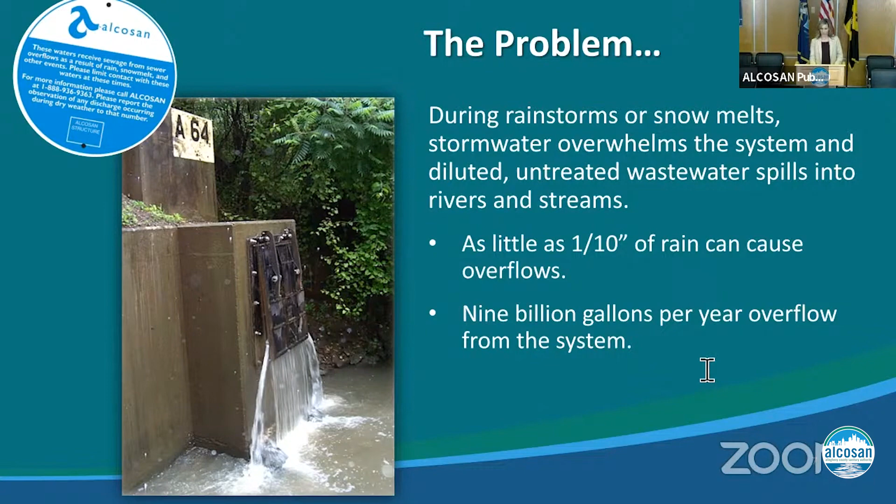So today we're going to share with you the solution. The solution is ALCOSAN's Clean Water Plan. This Clean Water Plan was part of our consent decree, and it was approved in 2020. The first phase, called our interim wet weather plan, is to be completed by 2036. It's a $2 billion investment, and that $2 billion was in 2010 dollars. This plan will reduce the overflows in our region and improve water quality. Again, that's a joint goal for all of us. And this work includes a lot of benefits for jobs in our region.

Today's presentation will include 4 components of the Clean Water Plan: regionalization, GROW source control, plant expansion, and our regional tunnel system. Regionalization is a partnership with our customer municipalities where we plan to take over some of the trunk sewers so we can convey sewage from outlying municipalities down to the ALCOSAN conveyance system. Julia Spiker, the manager of regionalization, will bring us through that presentation today.

Our next topic is GROW source control. I don't think I have to introduce Tim Prevost today, but he is out in our communities educating our municipalities on what GROW is and how we can partner with them to hold that water or remove it from our system.

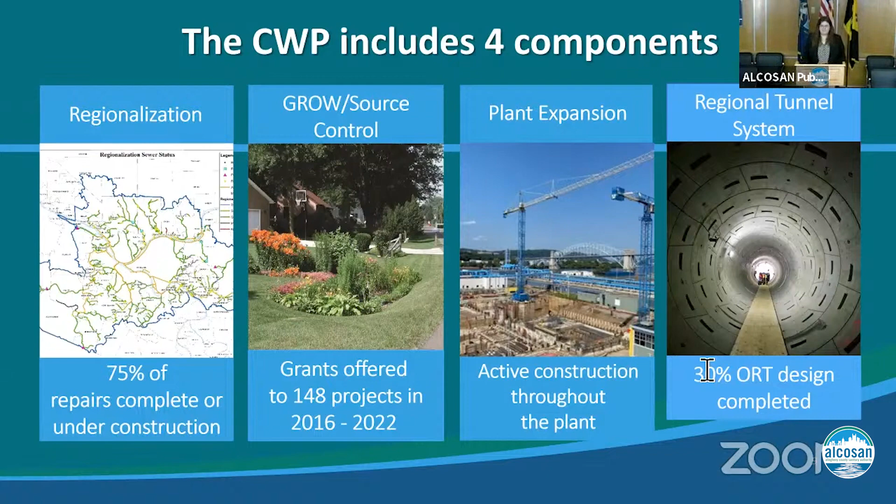Thank you, Michelle, and thank you all at home for tuning in. We have a lot of exciting updates on the regionalization program. Michelle mentioned that regionalization is one of the pillars of the Clean Water Plan that really involves the customer municipalities voluntarily electing to transfer some of their sewers from municipality ownership, operation, and maintenance to ALCOSAN's ownership.

Those sewers were identified through a lot of collaboration and communication with our stakeholders several years ago. We landed on criteria being sewers that were 10 inches in diameter or larger and conveyed flow from more than one municipality. When we looked at that criteria across our service area, that resulted in 265 miles of sewer eligible for transfer. The goal of our consent decree is to make a good faith effort to transfer at least 200 miles, so the criteria works. We met that goal and exceeded it.

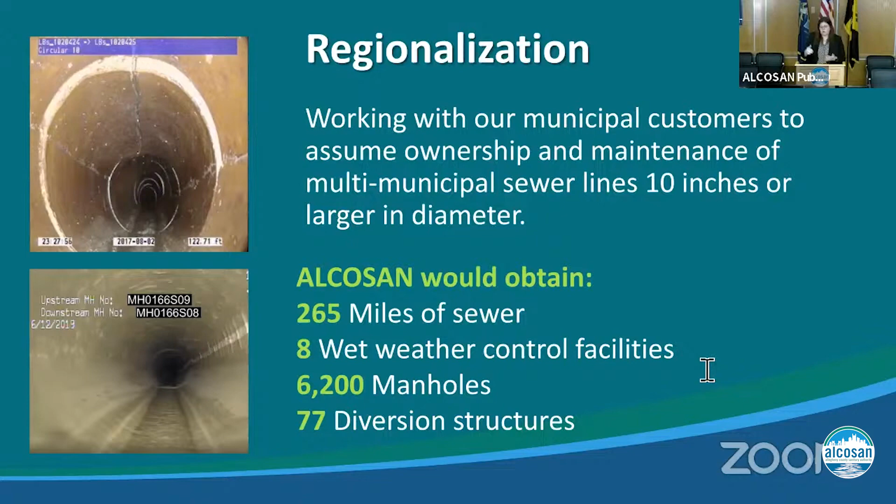Along those lines, there are 8 wet weather facilities. Those include pump stations to lift the flow so it can be properly conveyed to ALCOSAN for treatment, or equalization tanks, which are large areas where you can hold water back during wet weather and then slowly release it to the system when it has a chance to recover, helping reduce sewer overflows and contribute to our goal of cleaner water quality. There's also 6,200 manholes along those lines, and 77 diversion structures, which are simply locations where flow is directed either to relieve itself out of the system through an overflow or conveyed down to ALCOSAN for treatment.

So as I mentioned, this is a voluntary program, but there's a lot of reasons why ALCOSAN is committed to this, as well as our customer municipalities. By taking the existing infrastructure we have and investing in it properly, we can leave this region with a system optimized in its hydraulics, conveying more flow. We also have the ability to make smarter investments of ratepayer dollars for projects that give us the highest return to meet the goals of the Clean Water Plan and ALCOSAN's goal of reducing combined sewer overflows. It also removes some of the arbitrary barriers where municipalities are simply limited by what they can do within those boundaries. This program would allow the sewers to extend beyond that, so we can really look at what would be the right smart decision for each watershed.

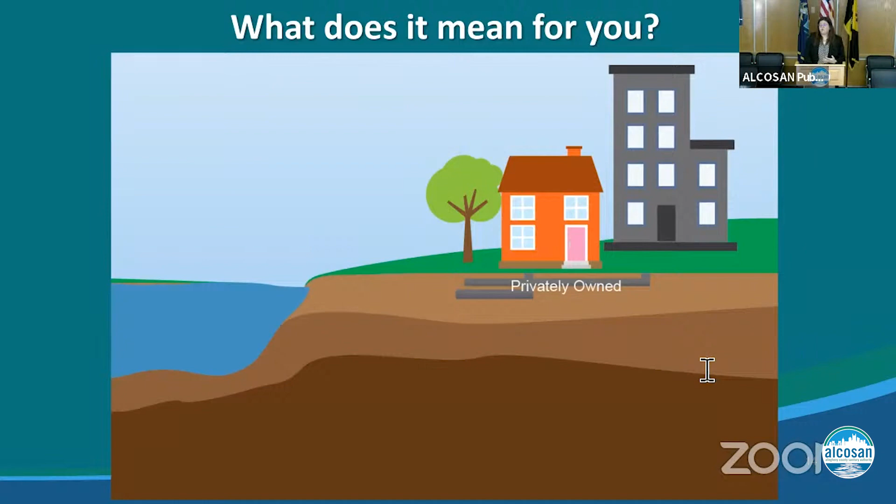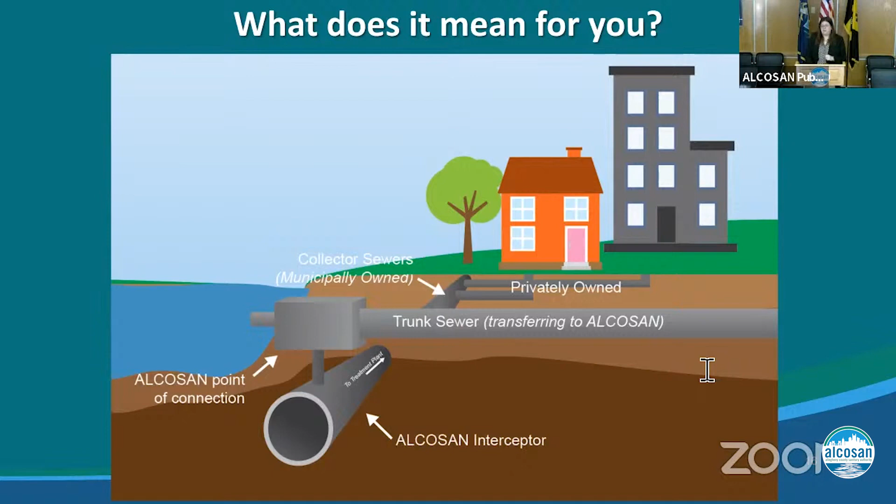So what does regionalization look like? Our homes and businesses have laterals, the first step on your journey down here to ALCOSAN. Those are typically privately owned and connect to a collector sewer, which is owned by the municipalities. Those collector sewers currently go into a trunk line, the larger diameter sewers conveying flows from many directions. Those connect to our existing infrastructure, those regulators where we tip that flow down into our interceptors and get it here. It's those trunk sewers that we're really focusing in on under the regionalization program.

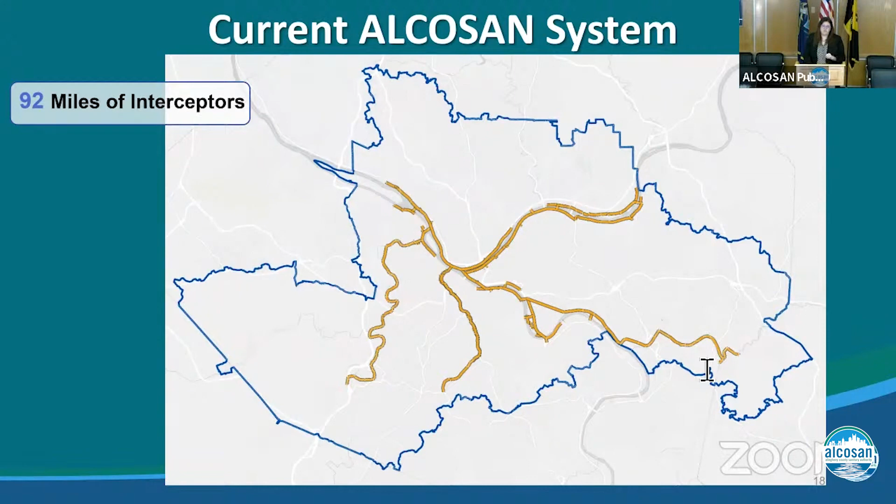ALCOSAN's system currently looks like this. All of those orange lines you're seeing are our 92 miles of interceptor. With regionalization, this is what the new system would look like.

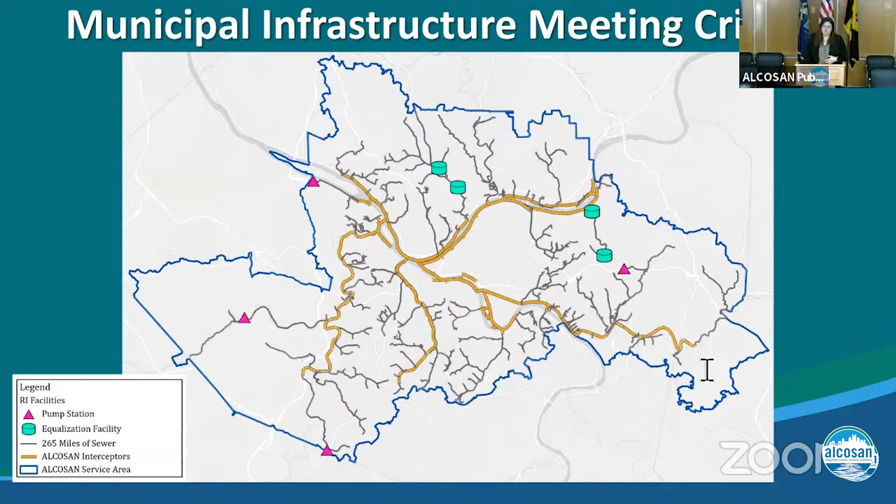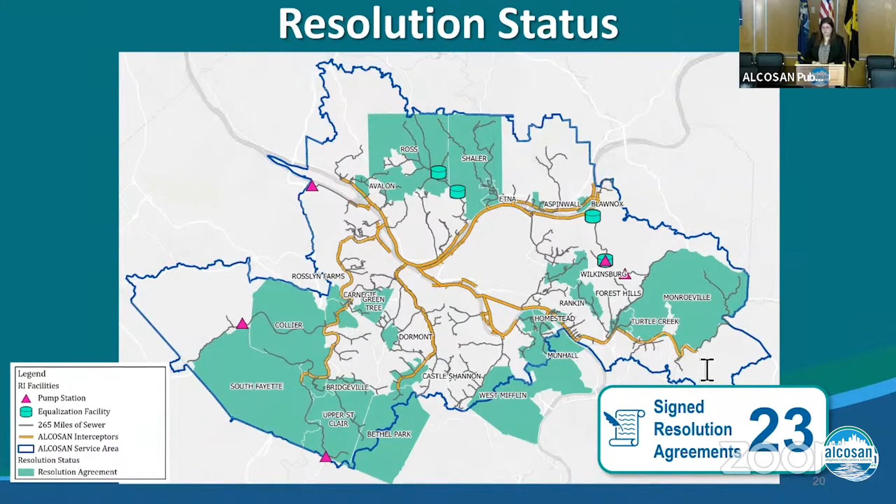It's a significant undertaking for the authority. Every one of those gray lines is one we're working with our municipal partners to transfer to our ownership and operation. Over the past year, the municipalities and ALCOSAN have made tremendous progress moving forward to that goal. The different municipal boundaries highlighted are those that have passed their resolution, which is really the first step where councils have said they want to move forward with the progress. These are the locations where they've committed to moving forward with transfer.

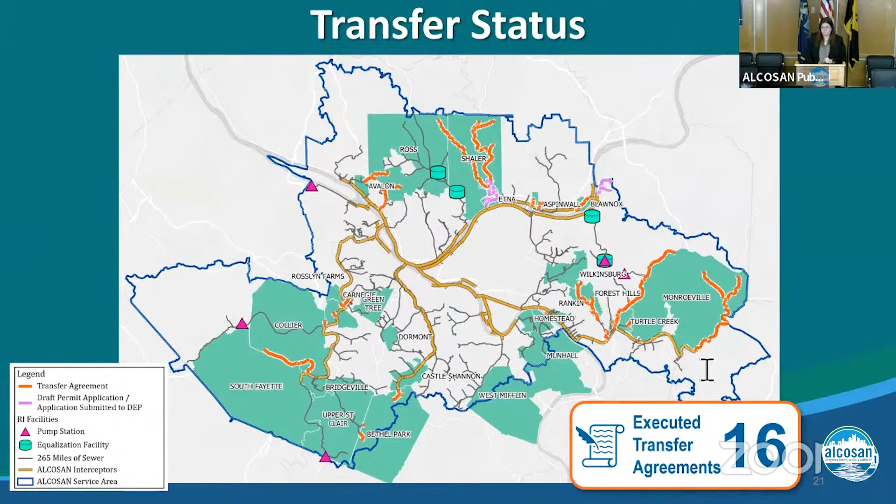I'm very happy to announce that ALCOSAN has completed transfer of 10 miles of sewer, and we have many more that are moving through the process.

The program is set up to be equal in its requirements and conditions for transfer across all of our municipalities. However, each municipality is different in their wherewithal and financial capabilities in moving through the process. We want to make sure that any municipality that wants to transfer has been supported through that effort. So we have two different paths.

One path looked at the defects identified through sewer inspections that began by ALCOSAN several years ago, where we inspected about 300 miles of sewers. Then we identified those critical defects where failure could be imminent, and the municipality needed to address those prior to transfer.

They can either complete those repairs, send us documentation, and then move forward with the transfer process, or we can negotiate and work together from the beginning on an appropriate cost for those repairs. ALCOSAN also has an option where we would allow them to pay us back over a period of time, so it's more achievable for municipalities that need that kind of support.

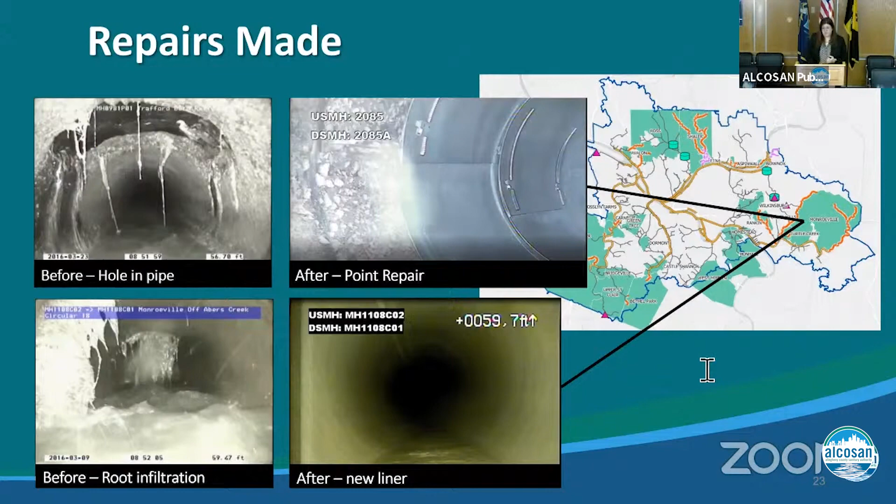Significant repairs have already been made. Typical defects found during that investigation could be holes in pipes or root infiltration, and the municipalities would go and make those repairs ahead of time and then send us documentation. We also saw some locations with fractures or collapsed pipes—those are really the ones we wanted to focus in on now.

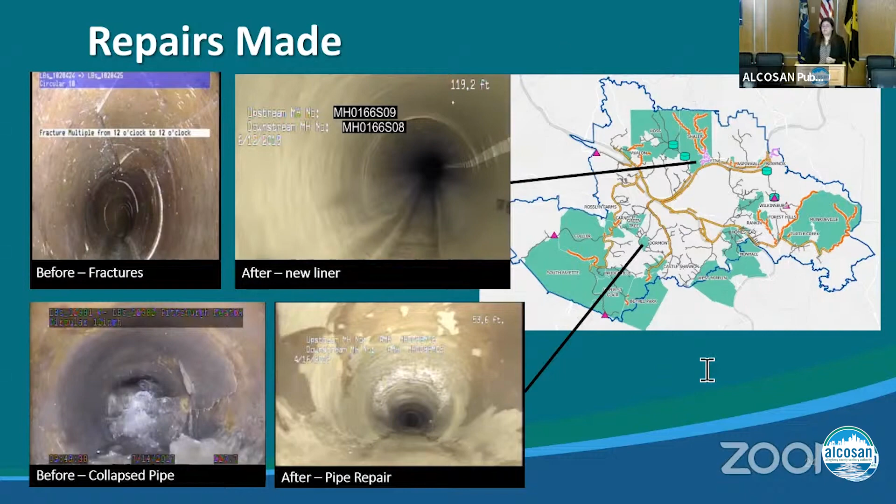It will be ALCOSAN's responsibility to maintain the repairs to this condition post-transfer. It will also be our responsibility to keep that infrastructure investment and the integrity of the sewers up to our standards and level of service, and we're doing that through our operation and maintenance.

Nate Carl is our manager of interceptor systems, and he oversees a crew of about 50 people with the right skill set and resources to mobilize and provide that service across the municipality, regardless of the type, size, or location of the sewer. So upon transfer, it would be our responsibility to operate and maintain the system that best supports ALCOSAN and our municipalities.

With that, I'll turn it over to Tim Prevost to talk about GROW and our source control programs.

Thank you, Julia. Today I'm going to share some progress that has been made with the Green Revitalization Of our Waterways program, GROW. GROW is ALCOSAN's $100 million grant program, and the objective is to provide incentive to our customer municipalities to do cost-effective source control projects throughout our service area.

The program began in 2016. We are currently just about to begin our 8th cycle of this program. In the first 7 cycles, we have over $70 million in grant funding offered to our customer municipalities, going towards 148 projects throughout the ALCOSAN service area. Based on these projects, we have estimated the overflow reduction will be roughly 227 million gallons a year.

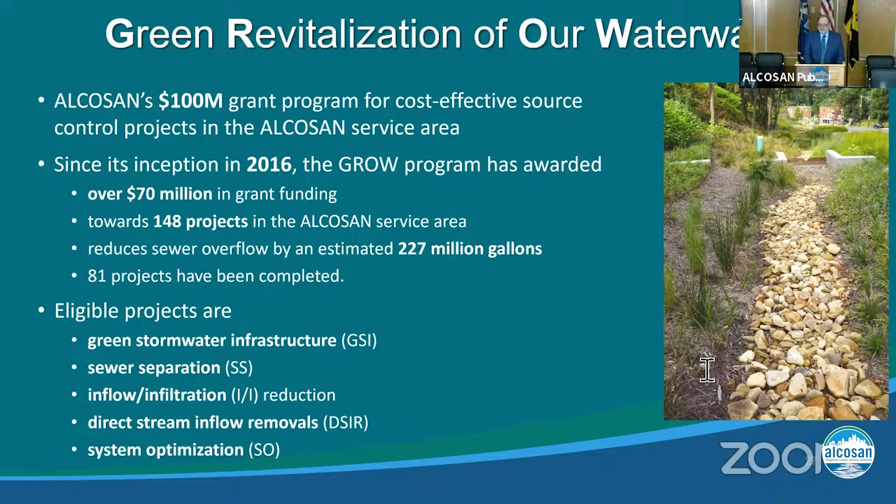Currently, and I'll talk a little more about this at the end of my portion of the presentation, 81 projects have been completed. Various projects eligible for GROW are green stormwater infrastructure, sewer separation, inflow and infiltration reduction, direct stream inflow removal, and system optimization.

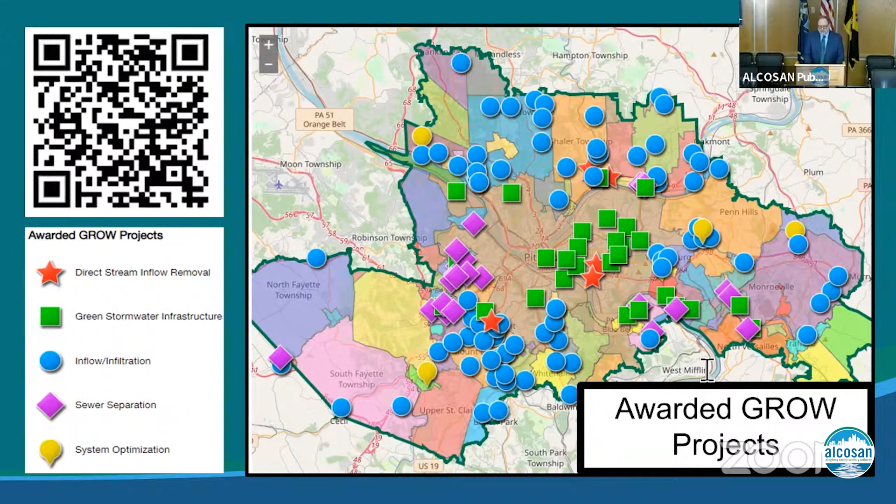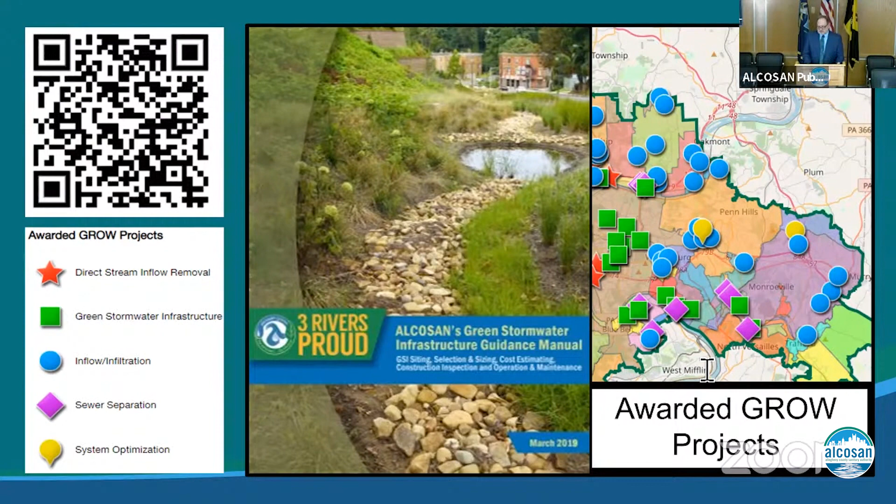I can give the audience a little bit of time if they wish to scan this. This QR code will take you straight to ALCOSAN's GROW site, where you can get more information about every project you see on this map. You'll also be able to get information on green stormwater infrastructure guidance, which is open to anyone in the public and will help you identify where a good project could be located and the various steps that go into siting a green infrastructure project.

And then you can also see a source control monitoring manual that we have put up.

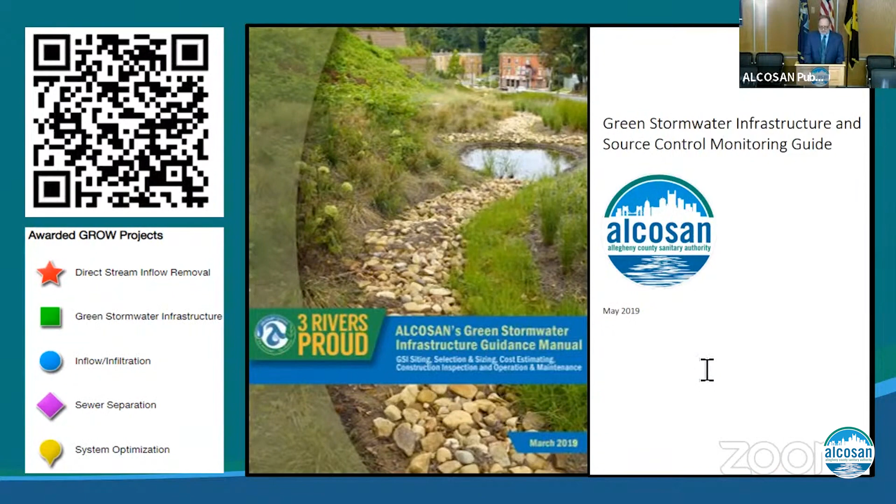Another resource ALCOSAN has provided to the public is Controlling the Source. Again, there's a QR code there. If you scan it, this will take you straight to the Controlling the Source page on alcosan.org. There you will find an executive summary, the entire report, all the appendices, and most importantly, an interactive online map, which will share overflow reduction efficiencies for the service area, a constraint analysis sharing what constructability impacts go into siting a green infrastructure project, and finally, potential project opportunities.

I would like to share with the public some highlighted projects. There are some green projects, some sewer separation projects, and a stream inflow project that I'd like to share with you.

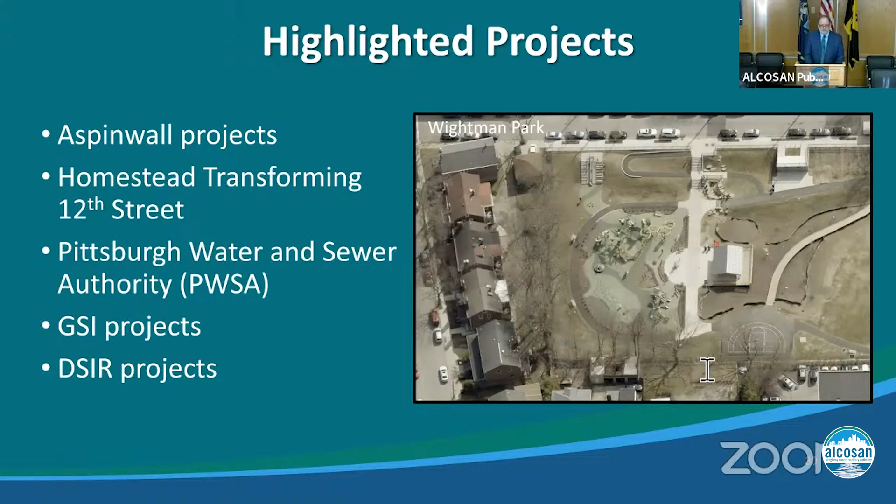The first I would like to share with the public is the Borough of Aspinwall. Aspinwall is a perfect example of a municipality phasing GROW projects to achieve a much larger goal. Since our first cycle in 2016, Aspinwall has put forward 4 projects: the Commercial Alley Green Infrastructure, Eastern Avenue Storm Separation, Center Avenue Sewer Separation, and Western Avenue Sewer Separation. All in all, ALCOSAN made an investment of $1.6 million.

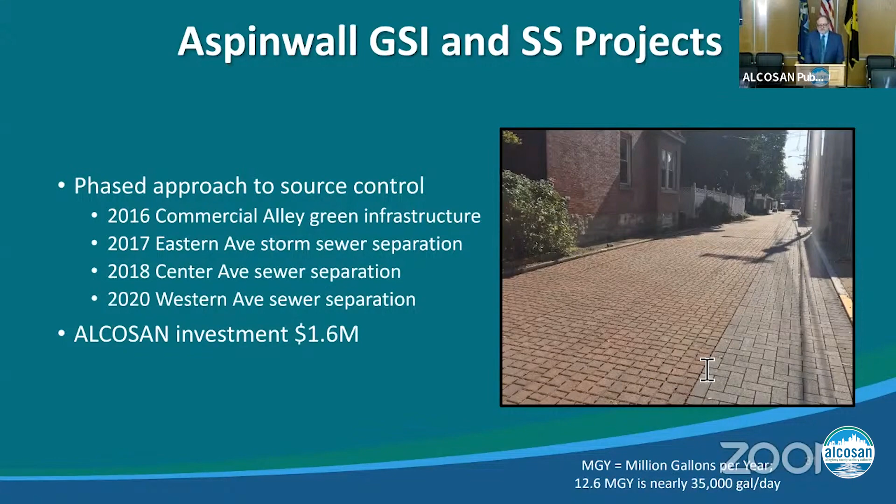The phasing of this started with the green infrastructure on Commercial, then they moved to Eastern Avenue, the following year Center Avenue, and then 2 years later Western Avenue. Upon analyzing all 4 of these projects together, we're anticipating over 11 million gallons a year of overflow reduction. We have seen in our monitoring efforts a little more than 12 million gallons of overall water being removed from the system. So again, Aspinwall is a great example of a municipality phasing their GROW projects.

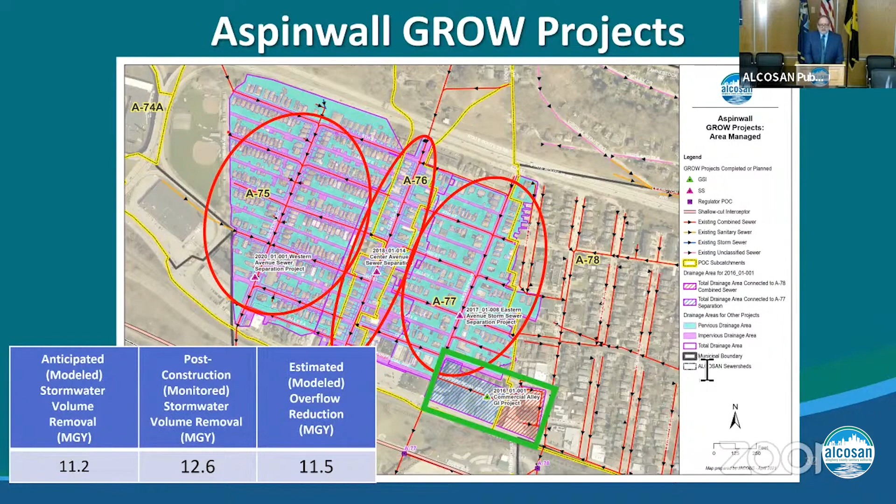The next project I would like to highlight is a good example of collaboration with ALCOSAN: Homestead's Transforming 12th Avenue. This project has been worked on for many years. Transforming 12th actually began as a school project for elementary school students at Barrett Elementary in the Steel Valley School District. This collaborative effort is between ALCOSAN, Homestead, and the Steel Valley School District.

What we tried to do when we helped Homestead develop this project was optimize the constructability and construction scope to maximize ALCOSAN's investment in the program. ALCOSAN hired an engineering firm, and we worked with the municipality and the school district to develop the plan for Transforming 12th. Based on the work we were able to do, we were able to provide this project an 85% match.

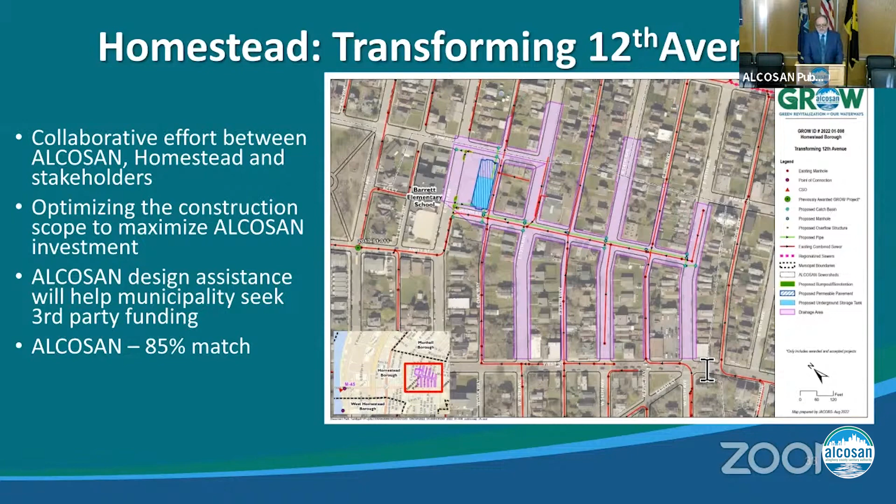What you see here is a layout of what the project is going to do for the municipality. Prior to this project, the playground area is asphalt, and the kids have to play on this asphalt. What we're going to do is switch it around to provide them with a park area that the school can utilize as a playground, and also parking for the teachers. Underneath the teacher parking is where some water storage tanks are going to be placed, and that water will slowly make its way back into the combined sewer system instead of it all going in during a rainstorm at once.

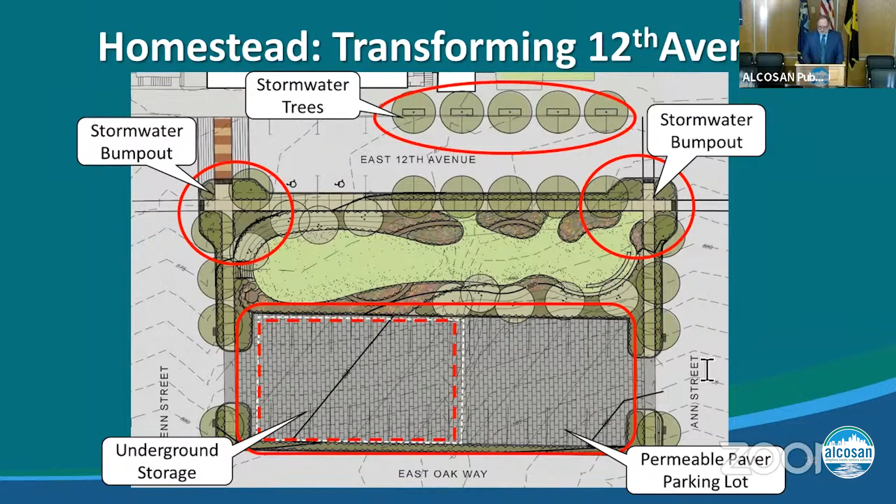The next projects I would like to share with you are from the city of Pittsburgh and PWSA. This map shows several projects throughout the city. I would like to focus on these 5 projects.

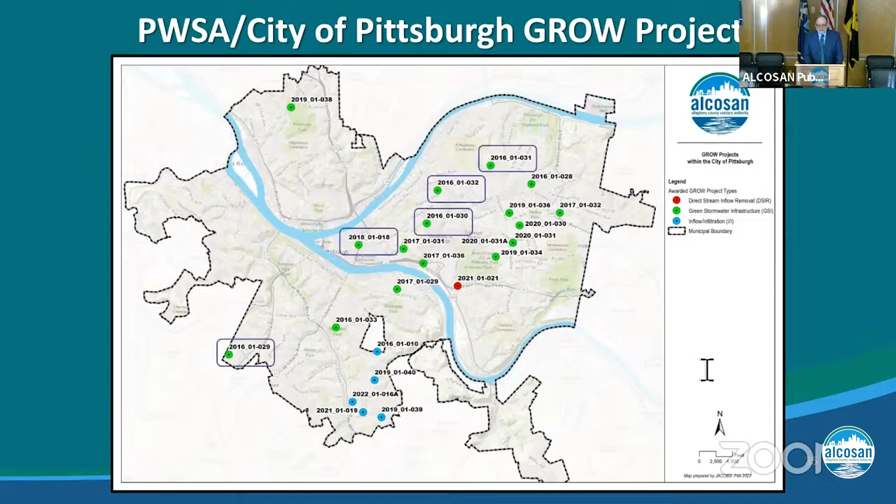These 5 projects have been completed. They have shared with ALCOSAN a final report showing the effectiveness these projects were able to produce. They are at Hasten Avenue in the Sawmill Run area, Centre and Herron in the Hill District, Hillcrest in Garfield, Melwood Avenue (I believe that is Polish Hill), and the I-579 Urban Open Space CAP project near PPG Place. All 5 of these projects are projected to reduce overflows by 3.5 million gallons a year, and ALCOSAN's investment in these projects was $1.6 million.

This is the I-579 Urban Open Space CAP project. This award-winning project features green infrastructure that is, for lack of a better word, beautiful. It's a great example of green infrastructure being implemented with a large-scale urban project.

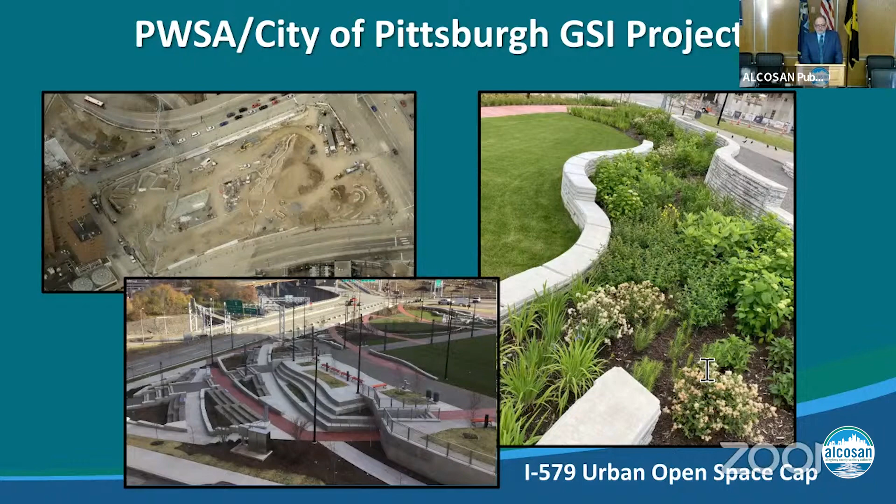These various projects from PWSA show the bioswales that they installed. All of these bioswales capture water and slowly release it back into the PWSA combined sewer system.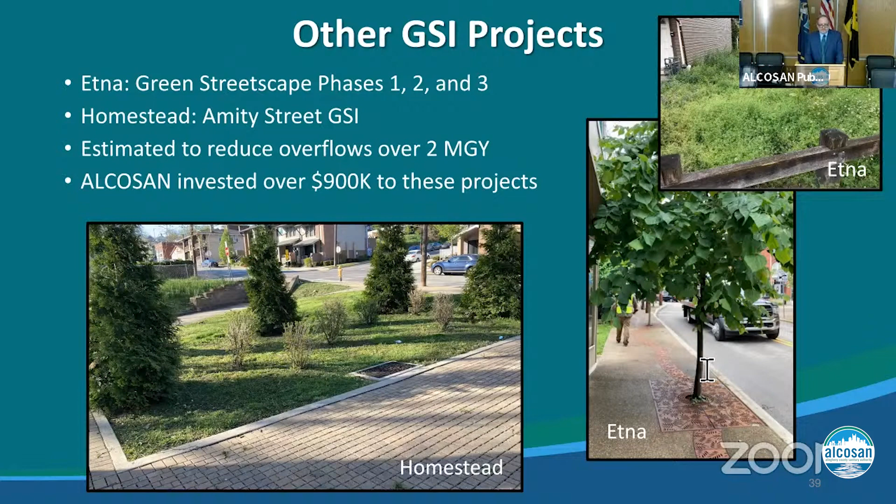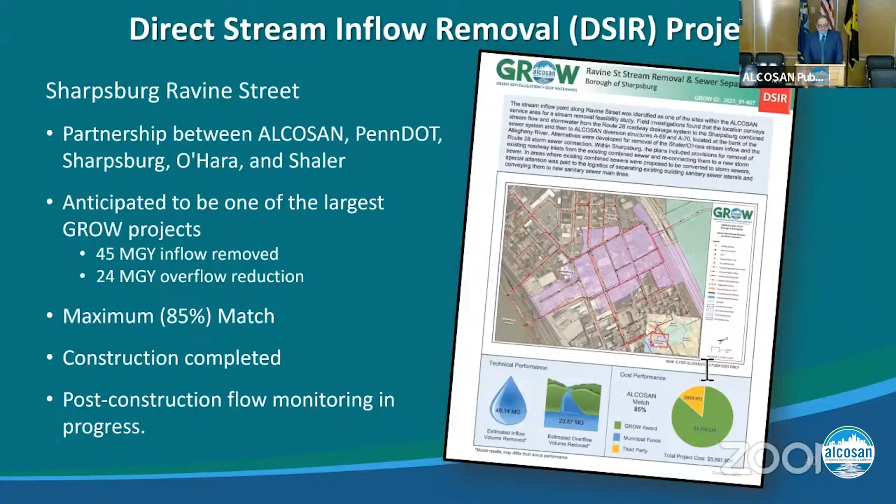So in summary, all the completed GROW projects number 81. ALCOSAN's investment for those 81 projects has been $14.6 million. The projected municipal match for those projects is a little over $16 million. When we model these projects, we estimate over 400 million gallons of stormwater removal.

But because of the post-construction monitoring, we were able to show that the stormwater removal was actually a little bit greater - over 700 million gallons a year of stormwater was removed from our system. Based on that information, we can run the models to determine overflow reduction. For these 81 projects, for ALCOSAN's investment of $14 million, we believe we were able to remove 75 million gallons a year of overflow.

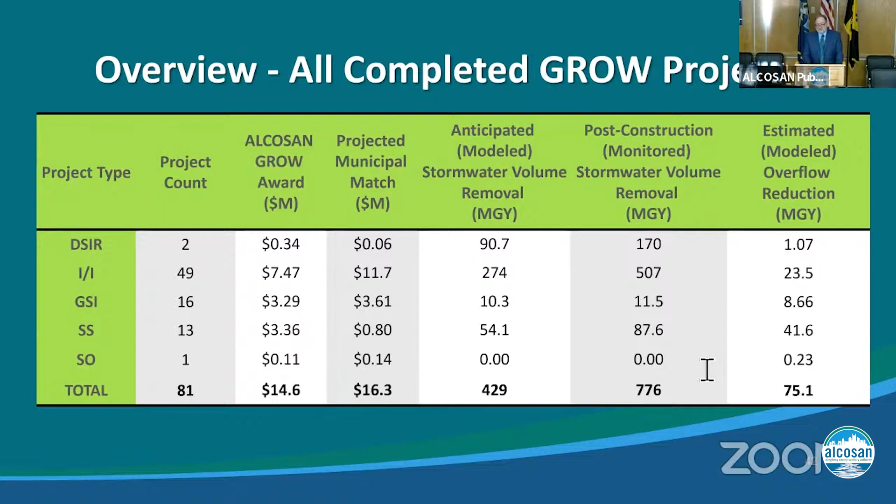That's it for GROW. I'd like to turn it over to Jeff Ardros for the wastewater treatment plant expansion.

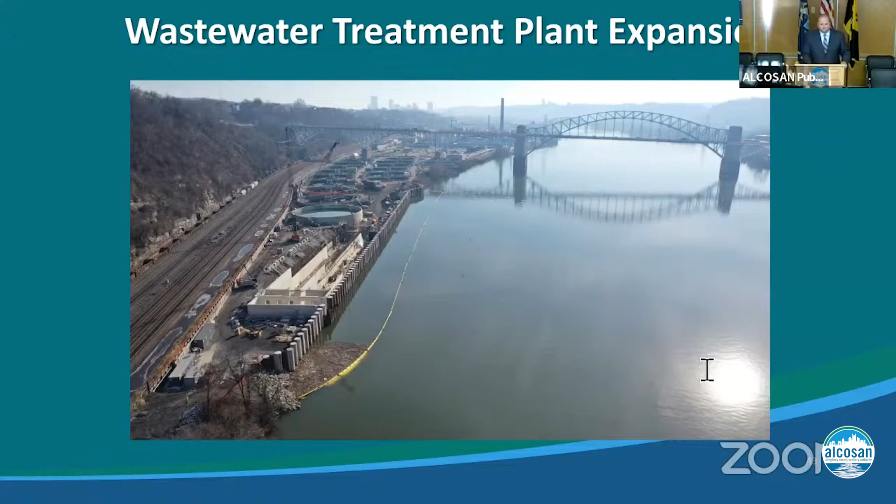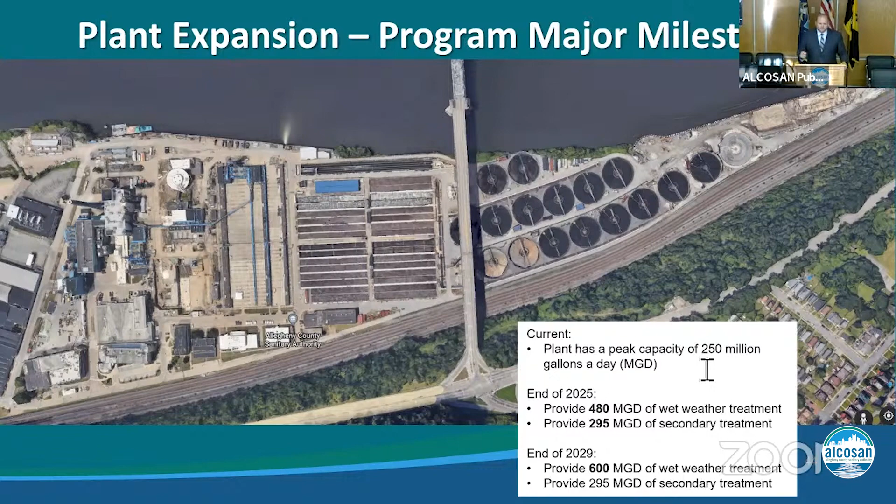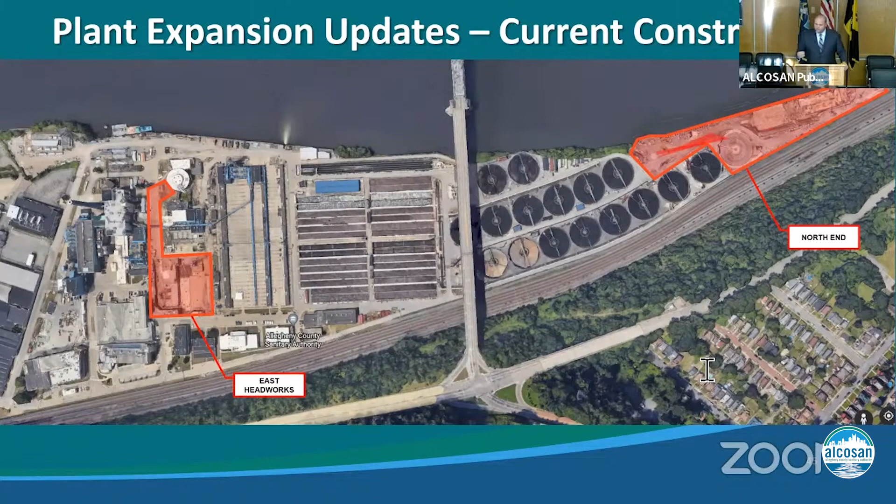Before I move on from this slide, I think it's important to highlight that image in the background. That is the current Google Earth aerial image. If you search for ALCOSAN on Google Earth, you get an actual image of our construction. It's great to see that opportunity where we are making that significant progress, and now it's highlighted on Google Earth if you want to go take a look at it. But remember that image as I transition to the next slide.

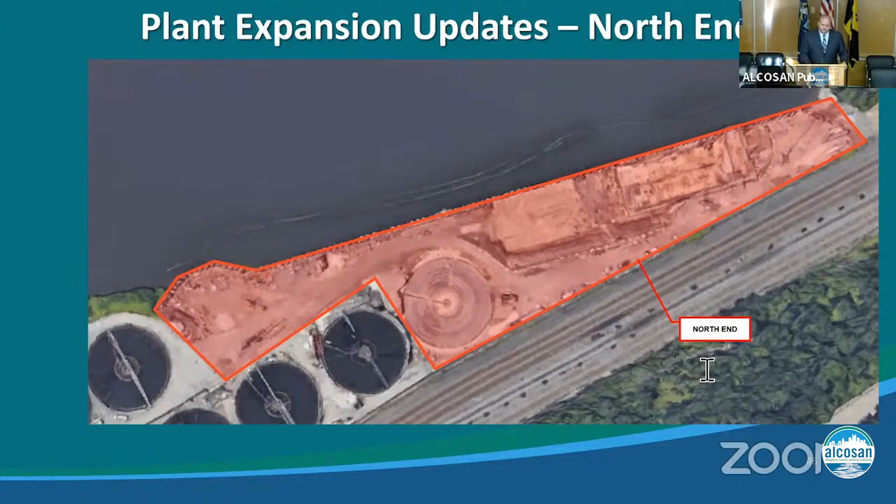First is our new final disinfection tank. That final disinfection tank had an interim milestone of end of 2023 to go live. Now, with that final disinfection tank, there is not an increase in plant capacity. It is just a relocation of our plant's outfall.

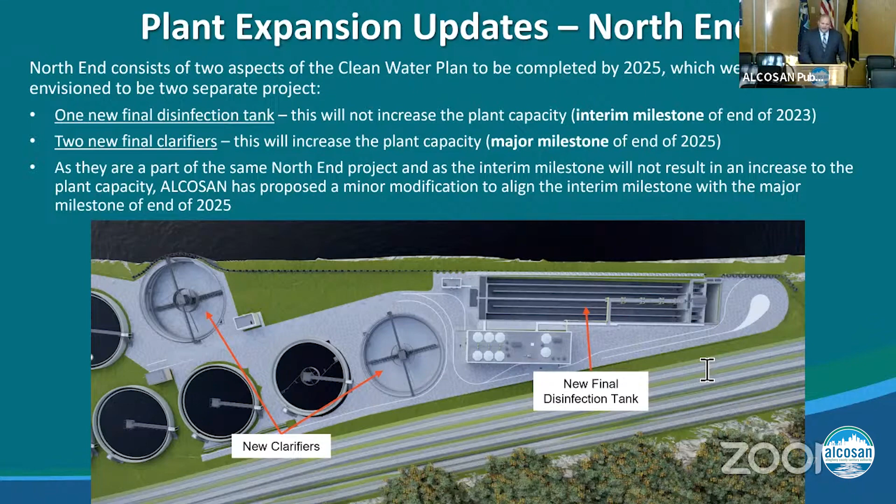The two new final clarifiers, the two circular tanks that you see on the left of your screen, that was the second project. Now, that project does bring about an increase in our secondary treatment capacity to 295 million gallons per day, but that has an end of 2025 major milestone. So ALCOSAN has proposed a minor modification to align the final disinfection tank interim milestone with the major milestone at the end of 2025. Now, why this makes a lot of sense can be seen on this next slide.

The image on the left is what we shared with you last year at the public meeting. We were really highlighting the river wall. That was our big crowning achievement. We had just finished it in November of 2021. Now, the image on the right is where we are at as of the beginning of this year. As I've stated, we're starting to see these concrete process tanks take shape.

You can see the disinfection tank in the distance. You can see the eastern of the two clarifiers. The shell is actually complete, and in this image, you can see it going through watertight testing. We're making significant progress on these tanks.

Now, why the aligning of these milestones is important is that ALCOSAN, because this all got rolled into one project, rightfully so, because it really is a much more constructible project being one, but it also allows traffic to be maintained throughout this construction site throughout the duration of the project, which is important. So as you can see, that disinfection tank may be lagging a bit behind, but the clarifier is moving way ahead of schedule.

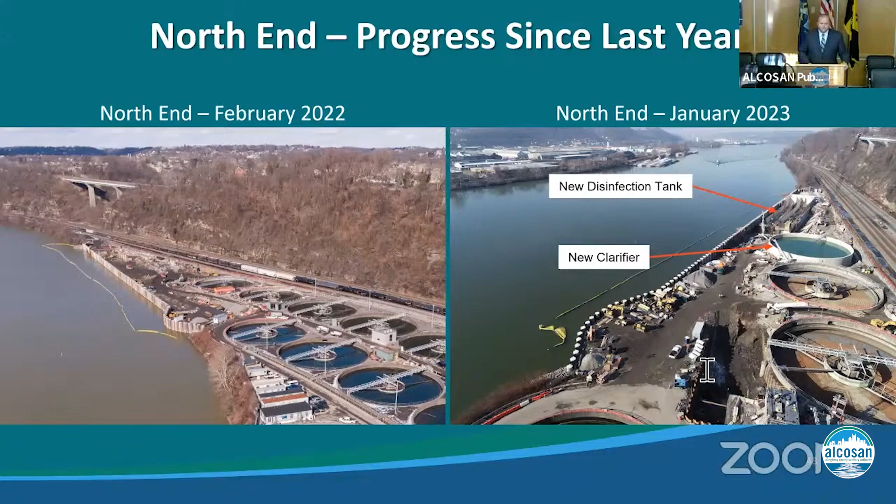Now we've talked about the north end. Next up, we'll talk about the east headworks, and we'll start with a time lapse.

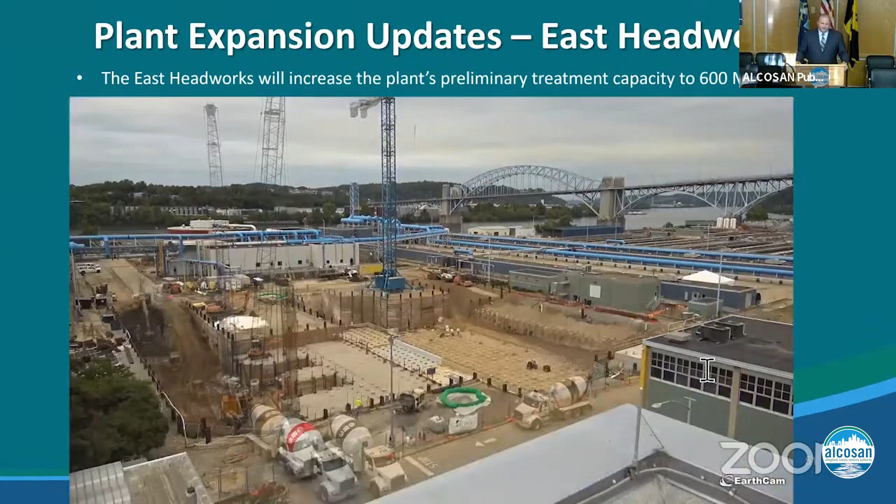That will begin at the end of 2021 when we broke ground. Now our hole is about 20 feet deep here at this point, and you're starting to see the foundation auger cast piles at the base. You see our tower crane in the distance, and you'll see another tower crane showing up on the right side of your screen. Finally, you'll start seeing rebar and then concrete being poured, which takes us to about today.

If you came out to open house last year, the plant expansion booth was actually planted right at that stop sign at the bottom of your screen. So if you came back to see us, you got an opportunity to see this active construction site live, and you also got a chance to try on an ALCOSAN vest and hard hat and take a photo in front of the site, and also that awesome tower crane behind it.

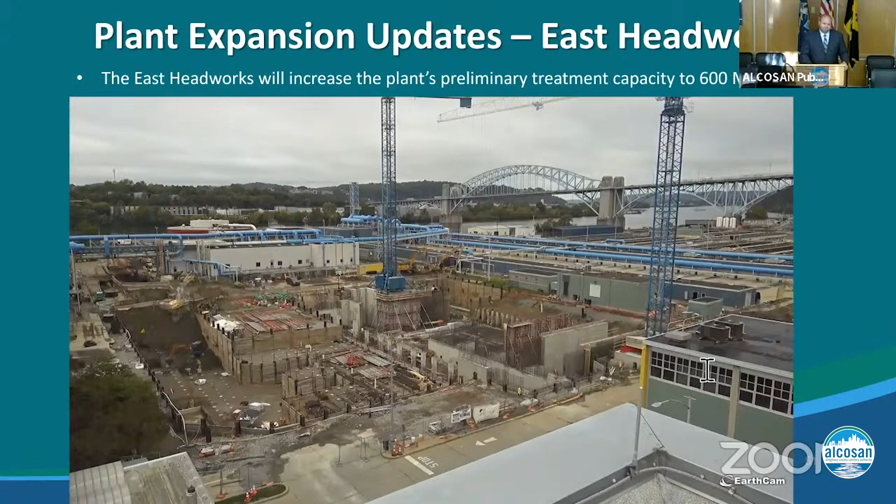So we've talked about these two projects, and note that the text at the top has now changed. These are projects associated with that major milestone of 2025 - our flagship plant expansion projects that are going to implement these additional peak capacities that we've talked about. But we're not done. We still have another one to come that will be breaking ground later this year called our CSO bypass and disinfection project.

Now we have contractors on board as of the end of 2022. We'll be breaking ground later this summer, hopefully by June, July timeframe, and we'll have some images to share at future annual public meetings or open houses. Right now, we haven't broken ground, so there's nothing to share, but we look forward to those opportunities moving forward.

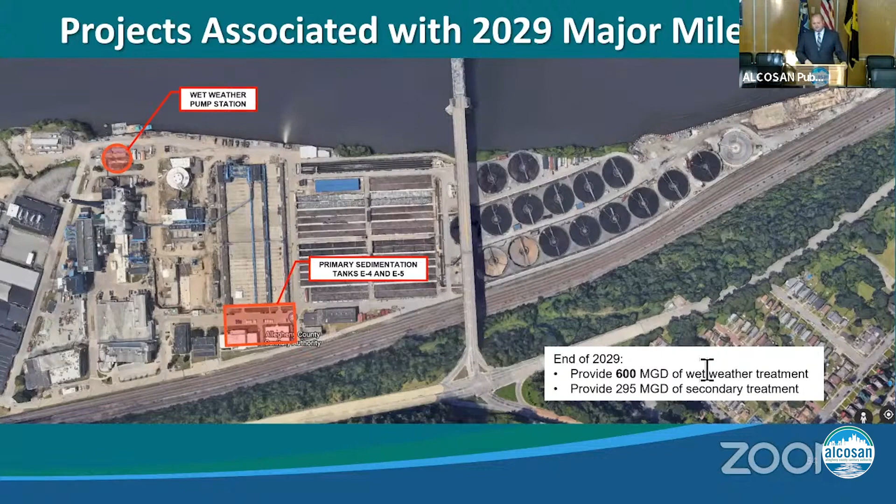Now, note the text at the top has changed again. Now we are talking about the flagship plant expansion projects associated with that end of 2029 major milestone that will increase our wet weather treatment capacity to 600 million gallons per day. There are two big ones: our wet weather pump station, which you see at the top of the screen, and our primary sedimentation tanks E4 and E5. So we'll start with our primary sed tanks.

Now, the E4, E5, that's just ALCOSAN identification. Essentially, we have two new primary tanks to increase our total tanks from 9 to 11. And if you've got a keen eye, you've noticed that in the image behind, there are actually two buildings in the way of where these primary tanks will be: the laboratory and the industrial waste building.

Now, this goes back to one of the first things I said. One of the biggest challenges that we have with the plant expansion is lack of available space, but we have to get creative at times. And this is an opportunity where we took one.

So the other area highlighted on this image is a surface parking lot. We were able to consolidate that surface parking lot into a smaller footprint by first building a parking garage, so we have the same amount of parking in a smaller footprint. What that did is it opened up a little bit of space.

And with that extra space, we're going to be building a new building called the Environmental Compliance Facility. This will have a lab in it, as well as office space for the staff that sits in the laboratory and the industrial waste building. That staff will be relocated to this new facility, which will allow us to have step 3 of the phase in preparation for the primary sed tanks: demolishing the laboratory and the industrial waste building.

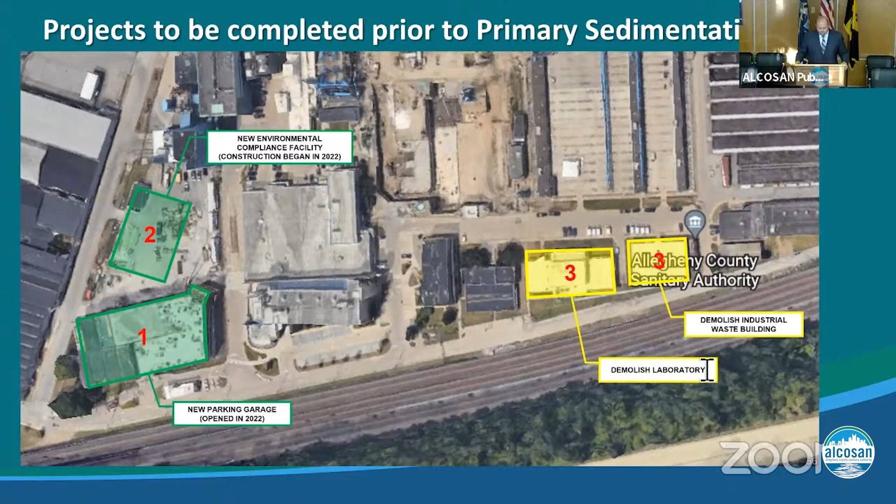But at the annual public meeting, we want to highlight what we've done in the last year, so we'll focus on the first 2 steps. The parking garage is now complete. We opened it as of November 2022.

And if you came to open house, you walked right by it - it's right next to the entrance. So that was really the first opportunity for the public to see the parking garage. The other thing to highlight, on the right side of the image, is our active Environmental Compliance Facility site. We did break ground on that in November of 2022 as well, so we're seeing some progress over there.

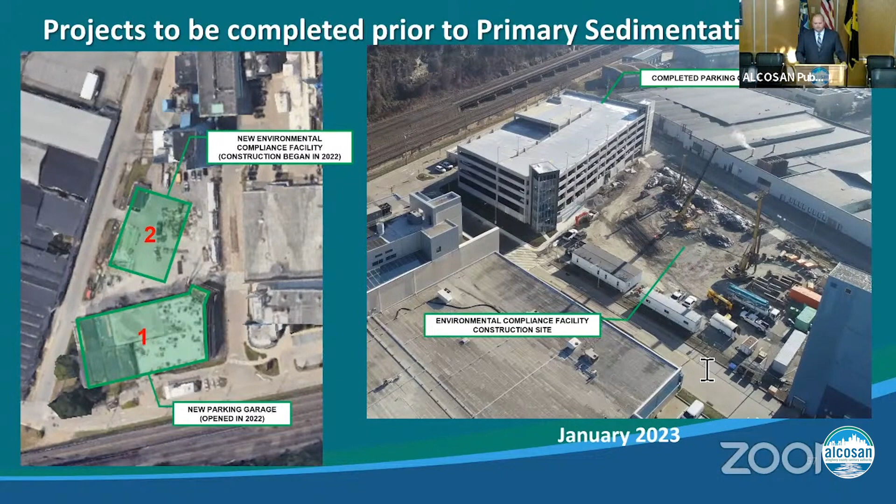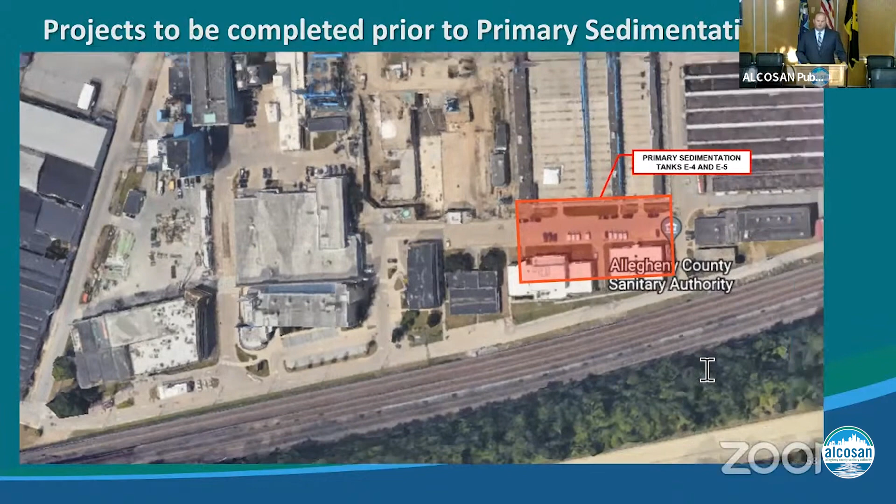All of this is in preparation for our primary sedimentation tanks E4 and E5 project. So I mentioned we have 2 big flagship projects associated with this 2029 major milestone. They are dependent on each other to achieve this wet weather treatment capacity of 600 million gallons per day, and I will explain why.

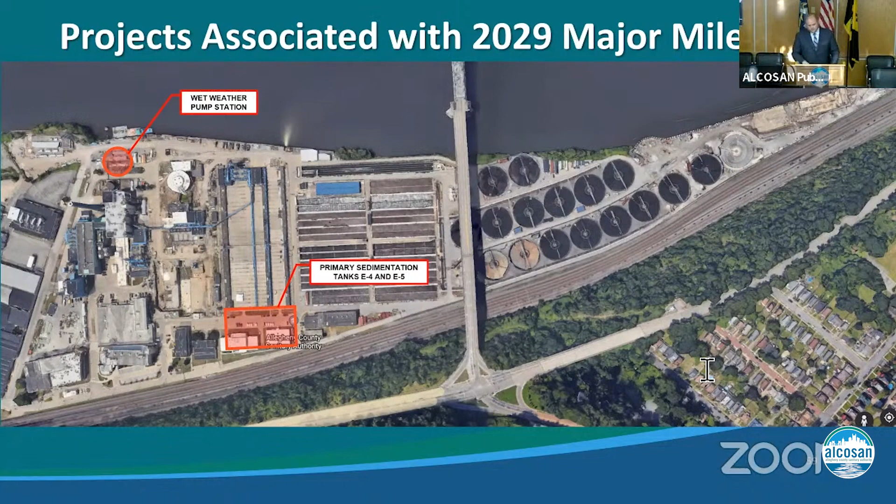First, our primary sedimentation tanks project. It currently has an interim milestone at the end of 2027. With that, we will be able to increase our plant's primary treatment capacity from 480 million gallons per day to 600 million gallons per day.

However, our plant isn't going to be able to convey that flow to the primary tanks. That can't occur until the end of 2029, the major milestone where the wet weather pump station goes live. So ALCOSAN is proposing a minor modification to align the primary sed tanks E4 and E5 interim milestone with that major milestone at the end of 2029, to align it with the wet weather pump station.

So the last thing I'll leave you with is a little bit of discussion about our wet weather pump station.

If you came to open house last year, you saw this image on the right. That was our first opportunity to share a rendering of what this wet weather pump station is going to look like. We're still several years from building this. But if you've been to an ALCOSAN tour, or to our open house tours, you likely know we're big flag wavers for our main pump station, shown on the left of the image on your screen, which is the lowest point in Allegheny County.

It's about 100 feet deep. Well, when this wet weather pump station is built, it will be 150 feet deep. It will reestablish the low point of Allegheny County. In addition to being 150 feet deep, it's also going to be approximately 110 feet in diameter. It's going to be an impressive underground structure, and we're looking forward to this opportunity.

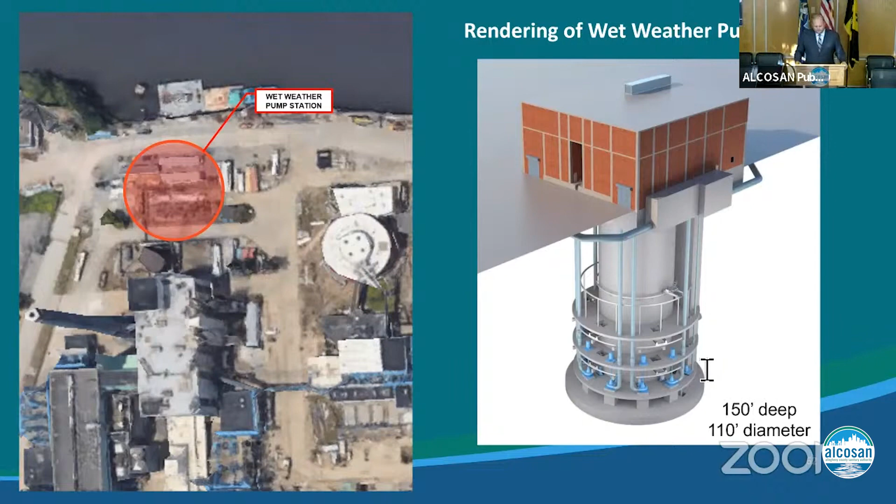The other thing to highlight about this project is that it's the touch point between two of the pillars of our clean water plan: the plant expansion program, which I've walked you through, and also the regional tunnel system, which Kim Kennedy will be talking about next.

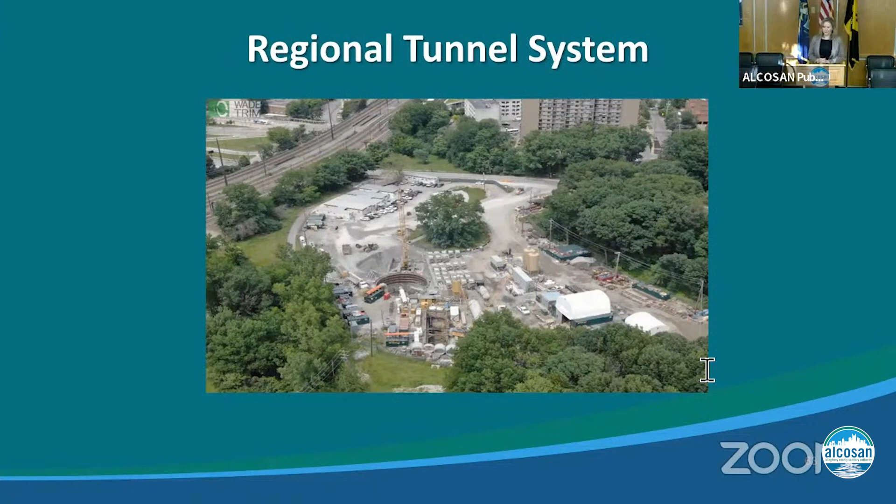All right, last but not least, the regional tunnel system. I think Julia did a wonderful job explaining our existing infrastructure, but this is a nice diagram to marry it up with what the new regional tunnel system will look like.

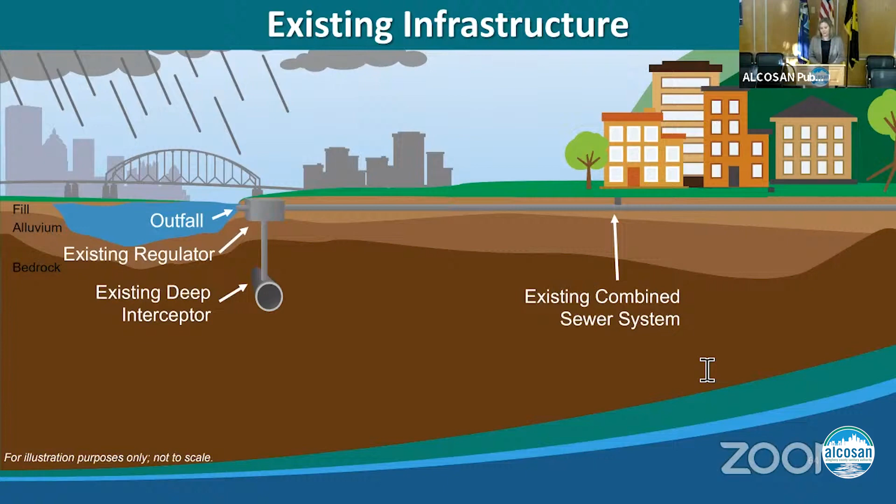So we've got our existing combined sewer system that comes over to a regulator and drops down into our existing deep tunnel interceptor. The issue is during periods of wet weather, overflows go out those outfalls and into our rivers and streams. So the concept with the regional tunnel system is to divert the flow from going out the outfalls into our rivers and streams, into a new regulator that will then go into a consolidation sewer and into our new drop shaft.

So we already have an existing deep tunnel interceptor. What we'll be doing now is building a wet weather tunnel system 50 feet below our existing deep tunnel interceptor, to capture and convey those sewer overflows down to the treatment plant for treatment. And we'll have the capacity available at that time based on the work already being done with the plant expansion.

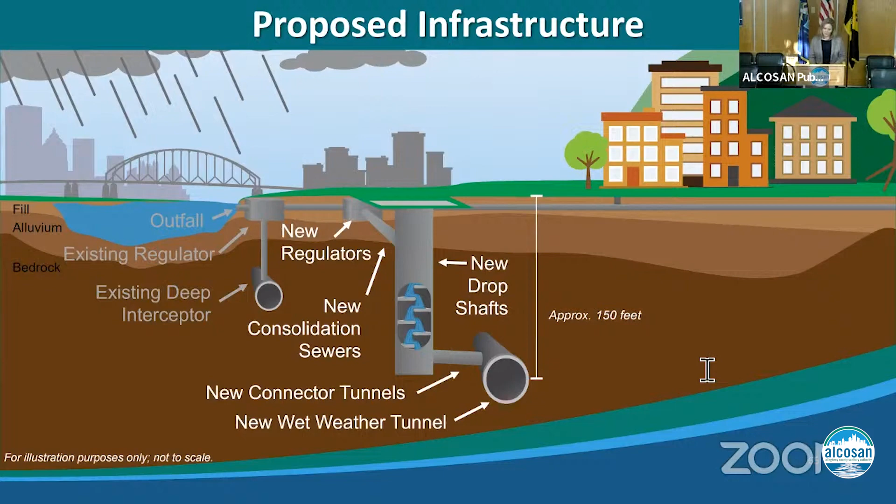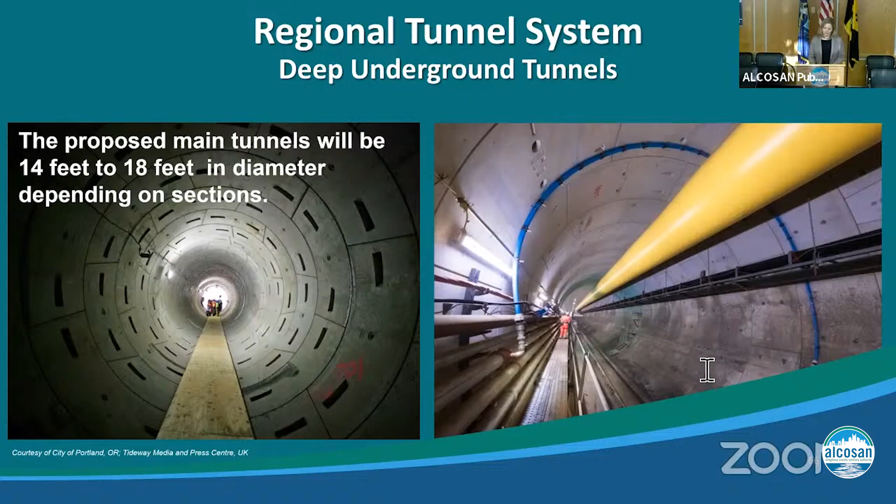So our main legs of the tunnel are going to be 18 feet in diameter. And then we've got two river crossing tunnels that will each be 14 feet in diameter. These are some nice photos from cities that have already done this work, showing what the interior will look like after the tunnels are built.

All of this infrastructure will be buried below grade. Most of it, the bulk of it, will be 150 feet deep. And then there's just a handful of near surface facilities that will capture those overflows and divert them through a drop shaft into the new regional tunnel system. But nothing other than a few very minor penthouses for access for gate control will be at the surface. This is underground buried infrastructure.

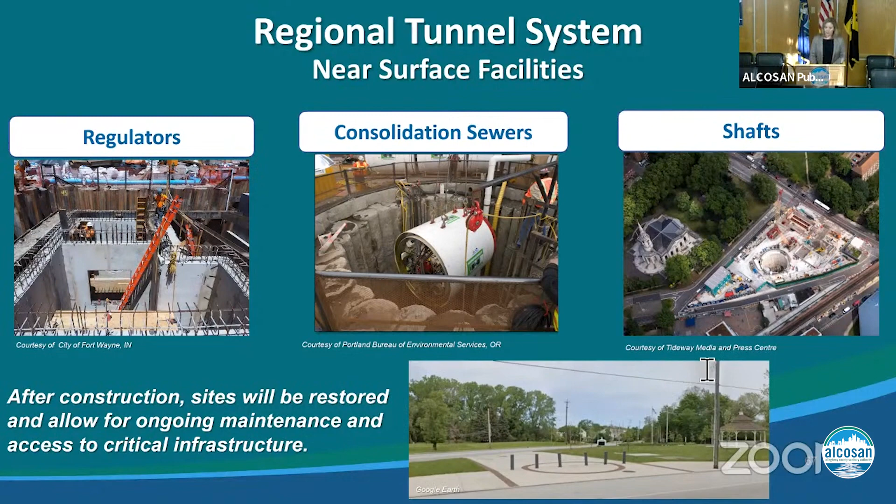So here is the proposed regional tunnel system. We are not going to build this all in one contract. This has to be broken into phases.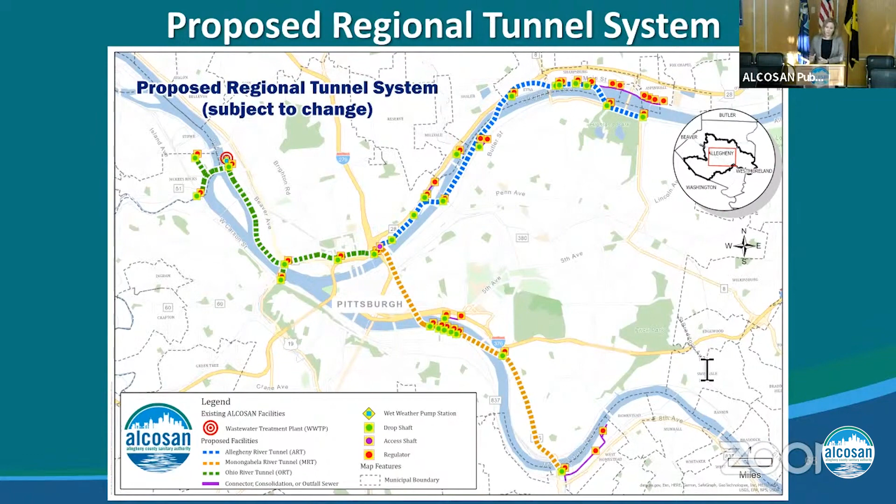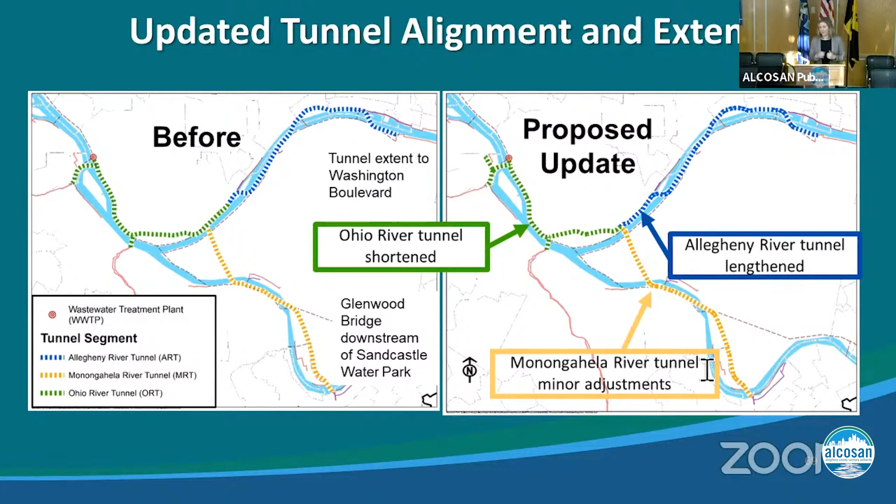One thing that has changed slightly from the preliminary planning and basis of design report is a slight adjustment to the alignment. The Ohio River Tunnel was shortened slightly, and the Allegheny River Tunnel was lengthened by that same amount. However, I'd like to point out that the length is still the same and is more than the initial concept, and the volume of storage and conveyance is still greater than the initial concept. So we're still delivering above and beyond what the original investment is. It's just that we're tweaking things as we've moved to final design, working through the details in reality of some of the engineering decisions that have to be made.

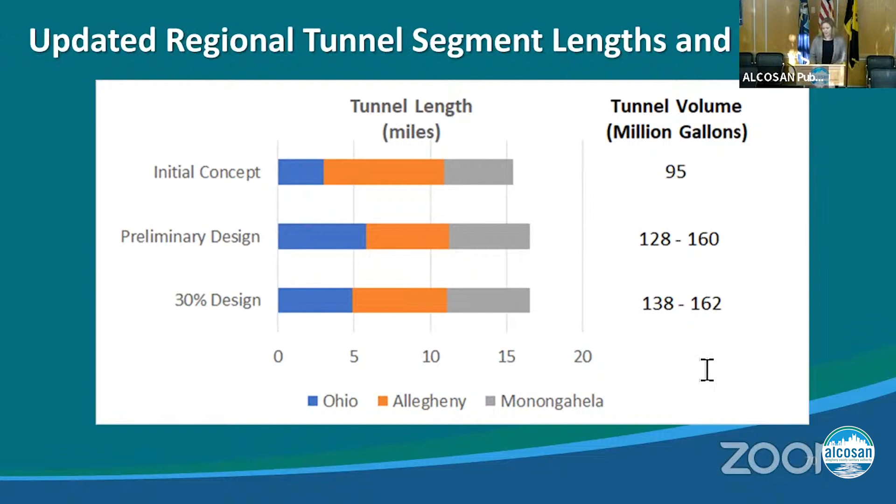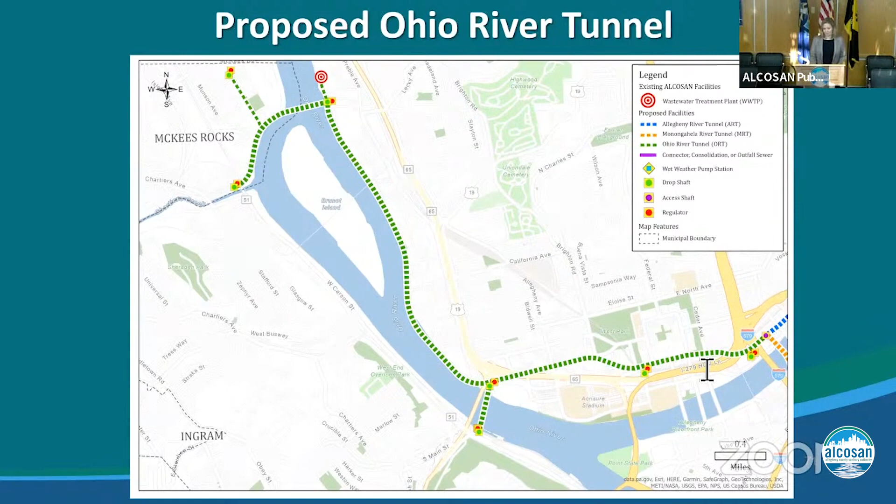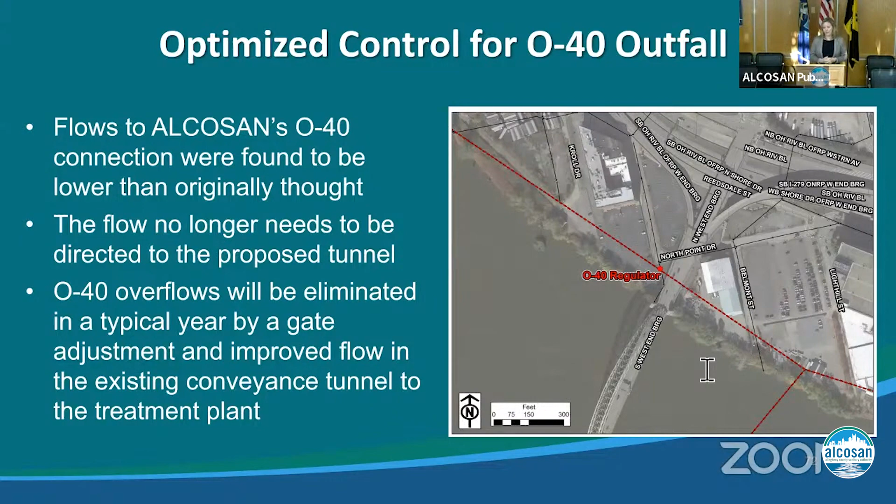So this is the alignment as it stands, moving quickly into the 60% design. A couple other things updated as part of this advanced design of the Ohio River Tunnel: we were able to remove the connection for the O-40 shed. We did additional dye testing, investigation and advanced modeling to confirm we no longer have to build that connection into the O-40 regulator, and that overflows will be eliminated by a gate adjustment and improved flow in the existing conveyance tunnel to the treatment plant. The second minor modification is the elimination of the connection to our existing Chartiers Creek interceptor on the other side of the Ohio River in McKees Rocks.

Something I'd like to point out, as you can see well in this image, is that the near surface facilities are located married up with our existing infrastructure. You can see our existing infrastructure shown in red, and the proposed infrastructure shown in green. Again, everything dashed is 150 feet deep below grade, and you see the drop shaft and regulators at the near surface. But anywhere you see our proposed work, it's where our existing infrastructure exists. It has to be there because that's where we're capturing the overflow going to the river and stream, diverting it into the new regional tunnel system.

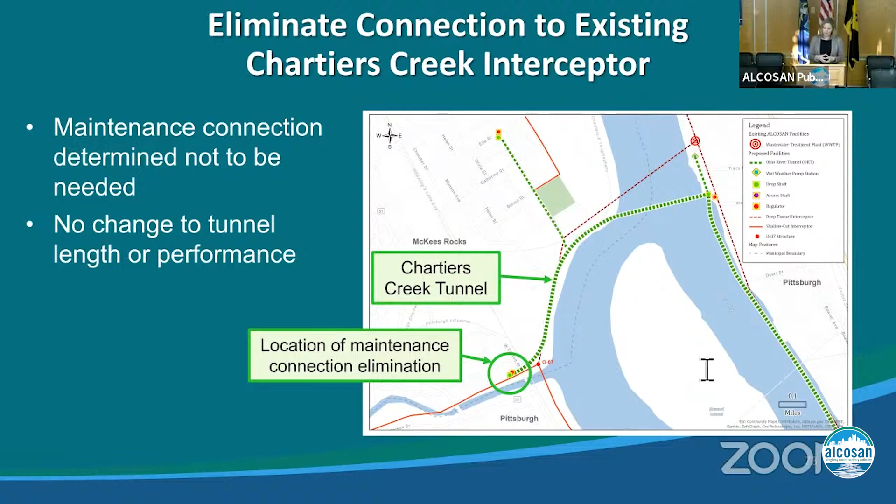So here we are, this is an image of the process for the Ohio River Tunnel. At the beginning of 2021, we brought on a tunnel program manager. At the end of 2021, we awarded the Ohio River Tunnel final design contract. Throughout 2022, we worked on the Act 537 special study incorporating planning for all 3 tunnel segments. Right at the end of 2022, we took receipt of the 30% design of the Ohio River Tunnel.

We completed a robust value engineering session and moved straight into 60% design while revising and incorporating the careful comments from value engineering. We'll plan on getting that the 3rd quarter of next year, moving straight into 90%. Most importantly, we're planning on bidding the Ohio River Tunnel in the 3rd quarter of 2024, and we have to start construction at the very beginning of 2025.

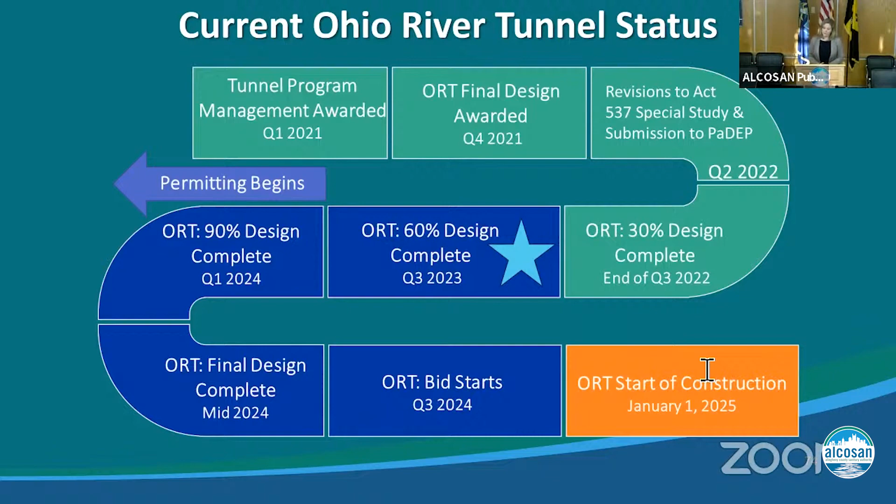Big picture, you can see that the wet weather pump station that Jeff talked about and the Ohio River Tunnel are really tied together. One cannot really exist without the other. The flows need to go somewhere, and they're going to be discharged into the wet weather pump station so that they can be pumped up into the treatment plant for processing.

In 2024, we're going to start design of both the Allegheny River and the Monongahela River tunnel segments. As everybody knows, with the supply chain and everything being slower, we want to give ourselves a little more time during the design phases of both of those tunnel segments to be able to meet our requirements of the consent decree during the construction phase. It just seems prudent to move those up a little bit.

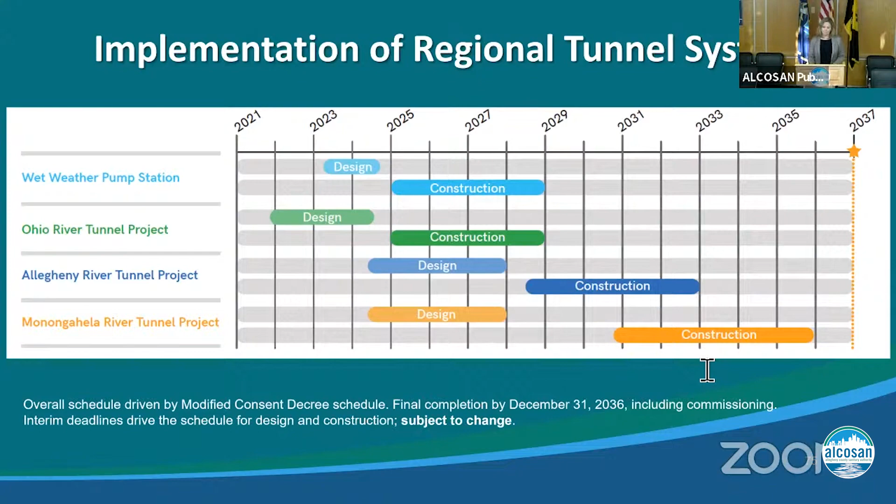What is important is that we are continuously improving and continuously learning. We're talking to Julia and Tim and Jeff, and we are incorporating adaptive management where it's appropriate into our plan and updating it. We will continue to update it as we move forward with the best engineering practices.

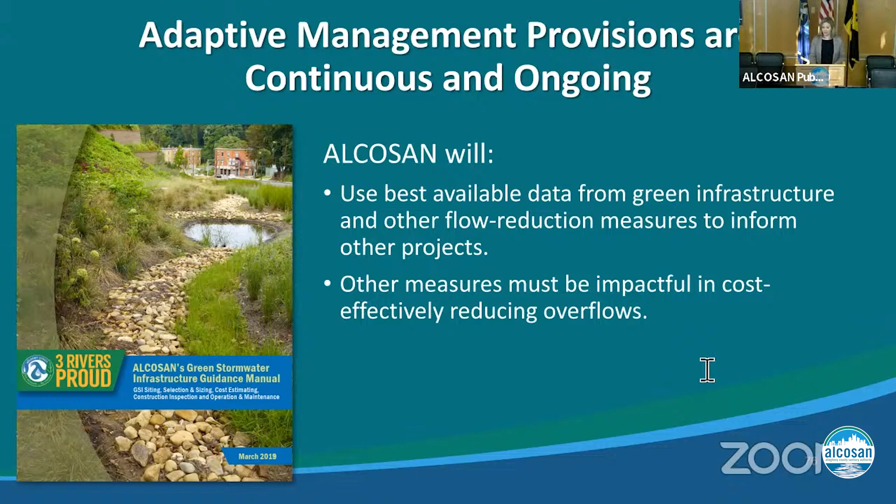That concludes our presentation portion of tonight's public meeting, annual public meeting, and we would love to start a Q&A session. But before we do, we did have two questions that have already been emailed in that I would like to address. One is talking about the quality of the water at the Allegheny River.

She says, as a boater docked on the Allegheny, I and other boaters were delighted at the Allegheny River quality, particularly its clarity and abundance of minnow fish. Can the quality be specifically related to ALCOSAN efforts? I would love to take full credit for that, but there are many entities working together to improve water quality in this region. We are one of them, but there are a lot of organizations and authorities with the shared mission of improving our water quality. I thank you for that comment.

The other question is about above ground infrastructure versus below ground infrastructure. I want to reiterate, there is no wastewater treatment being proposed anywhere other than this treatment plant on our existing campus. There will be near surface facilities that will be disruptive during the construction phase. After that, once we're through construction, it'll operate like the sewer system does now, out of sight, out of mind, getting it down here to the treatment plant where it can be processed and treated in one place. I hope that answers those questions.